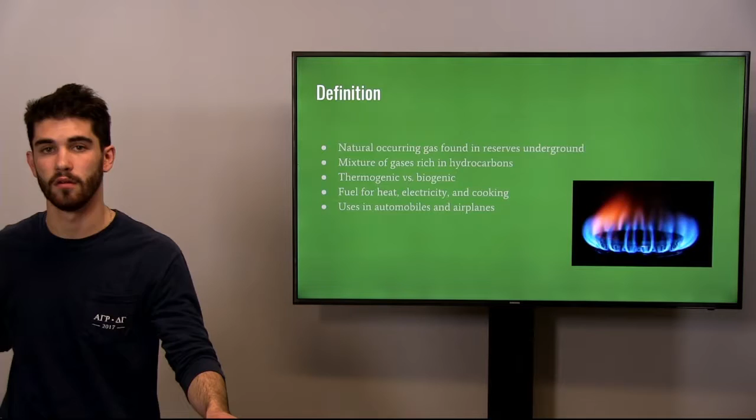Natural gas is used as an energy source for heat, electricity, and cooking. Along with these uses, natural gas can also be used as a fuel for both automobiles and aircraft. Liquefied natural gas is cryogenically stored for its usage. Condensation temperature ranges from about -120 degrees Celsius to -170 degrees Celsius, depending on the chemical composition of the gas. The advantage of LNG is its comparable density to both petrol and diesel fuels.

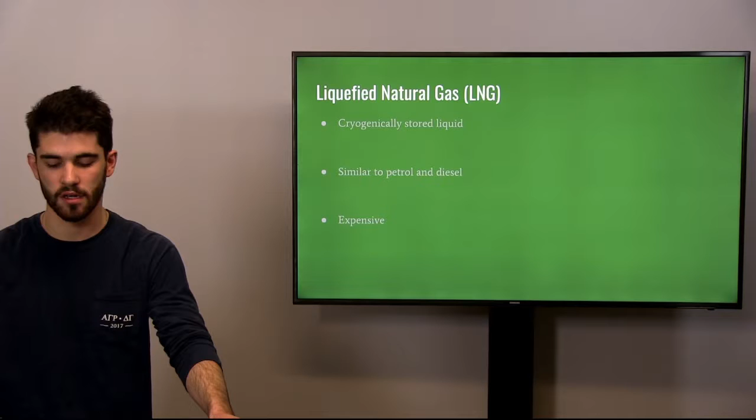It can reduce the need to refuel and extend driving range. However, the major disadvantage of LNG is the high cost of cryogenic storage and the upfront investments in both transportation facilities and dispensing stations. In countries like the US and Japan, this would be a viable option.

Natural gas is stored in high-pressure tanks within vehicles. The typical storage pressure ranges from about 20 to 25 megapascals. The combustion of CNG is a safer alternative to fuels like diesel, petrol, and liquid petroleum gas because of its fewer CO2 emissions. Another benefit of CNG is the fact that it's lighter than air and can dissipate quickly if leakage occurs. This would prevent explosions from occurring.

Liquid petroleum gas, also referred to as autogas, is another alternative to traditional fossil fuels. It is used as fuel for vehicles, heating, and cooking appliances. LPG replaces the chlorofluorocarbons involved with other fossil fuels in heating and cooking, and thus lowers CO2 emissions. While it still results in some air pollution, LPG, being a gas, does not result in ground or water pollution.

The main components of LPG are butane and propane, as well as butylene and propylene. It is a byproduct of natural gas processing and petroleum refining. Despite being a safer alternative to fossil fuels, LPG does not have the greatest engine performance. Another issue is that it is heavier than air and can lead to explosions if leakage occurs.

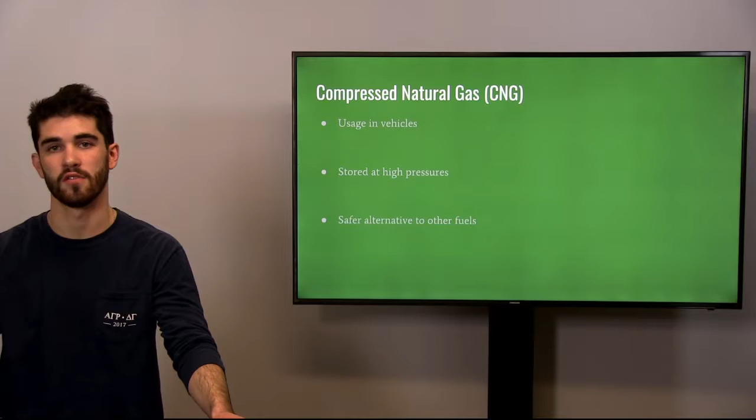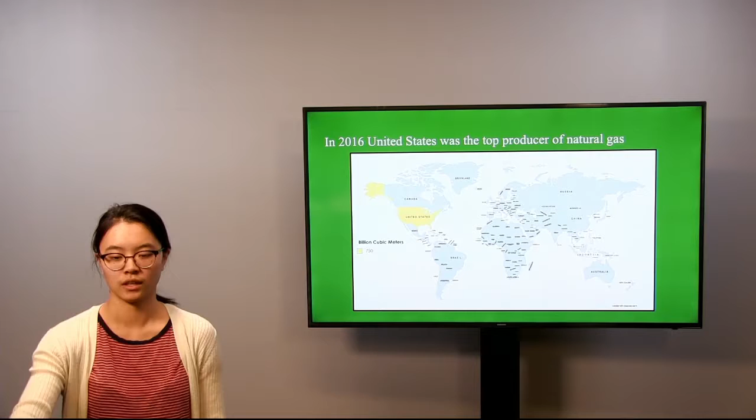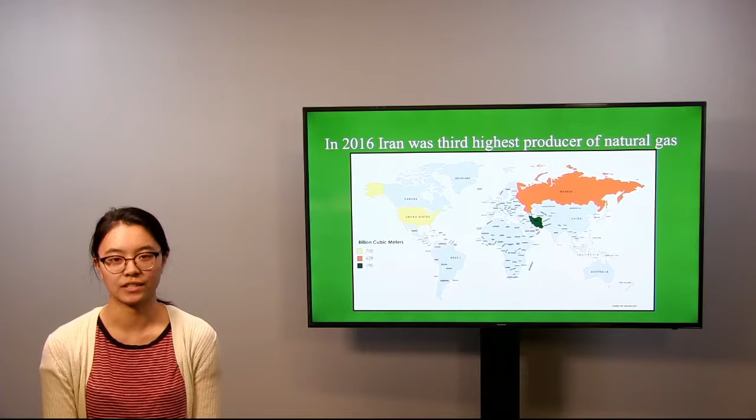So now we'll be talking about part 2, methods of extracting natural gas. But before we get into that, we will talk about the top producers of natural gas. In first place is the United States with 750 billion cubic meters. Second is Russia with 628 billion cubic meters. Iran was the third highest producer of natural gas with 190 billion cubic meters. And then fourth was Qatar with 167 billion cubic meters. And in 2016, the top consumers of natural gas were the United States, Russia, China, Iran, and Japan.

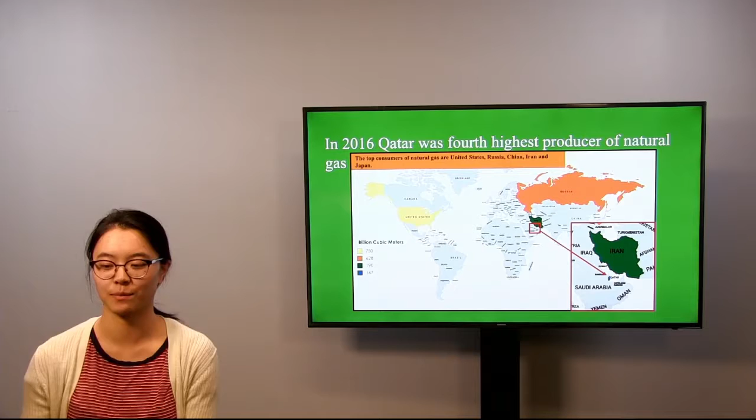Now we will talk about the extraction methods for conventional and unconventional gas. For conventional gas and unconventional gas, there are two different methods because conventional gas just uses the natural pressure and pumping methods, while unconventional gas is usually used for wells that are dried up.

So drilling is an extraction method for conventional natural gas. Step 1 would be to use a drill bit and pipe to create a vertical hole into the sandstone or the gas reservoir. Step 2 is to pump mud from the surface to the bottom and then to the surface for preparation. Step 3 is cement encases the casing, and within them is the drill pipe and drill bit. Then holes are drilled into the pipe for gas to flow in. And then step 5, the well is plugged and abandoned at the end of its lifetime, which is about 10 to 15 years.

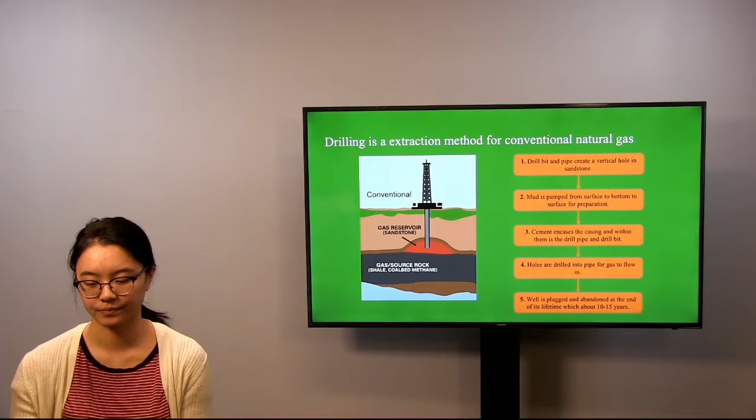So hydraulic fracking is used for unconventional natural gas. Step 1 is the well is drilled at least a mile before drilling horizontally into shale rock.

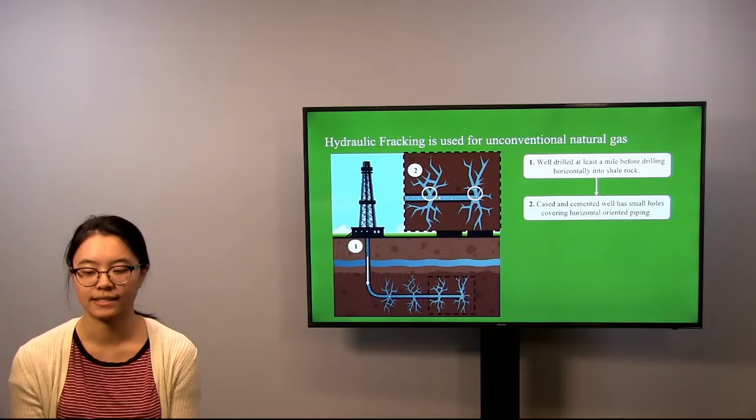Step 2 is it is cased and cemented. The well has small holes covering the horizontal piping to allow the gas to flow in later. Step 3 is a mix of 90% water, 9.5% sand, and 0.5% additives are pumped in at high pressure, and the sand is added because it helps keep the pathways open to allow the natural gas in.

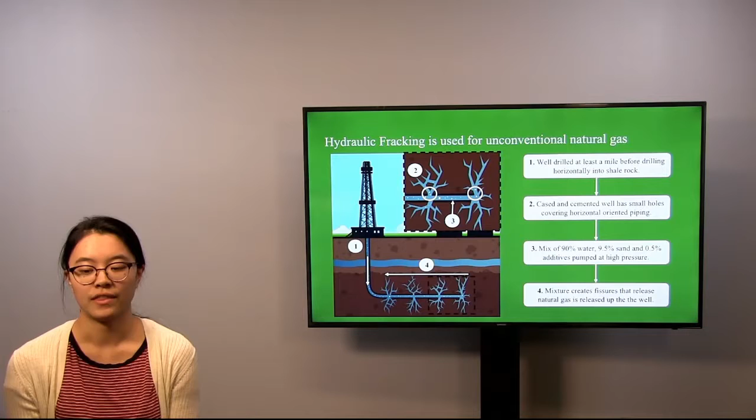Step 4 is the mixture that we just pumped in creates fissures that release natural gas into the well. And as of 2015, in the U.S., there are 21 states with active fracking sites, and there were 5 potential fracking sites.

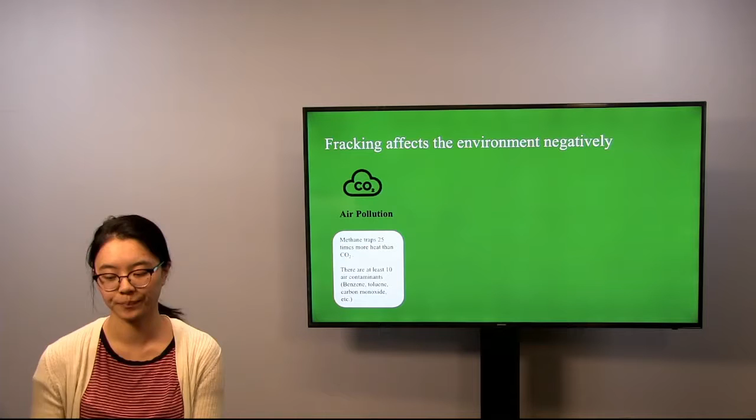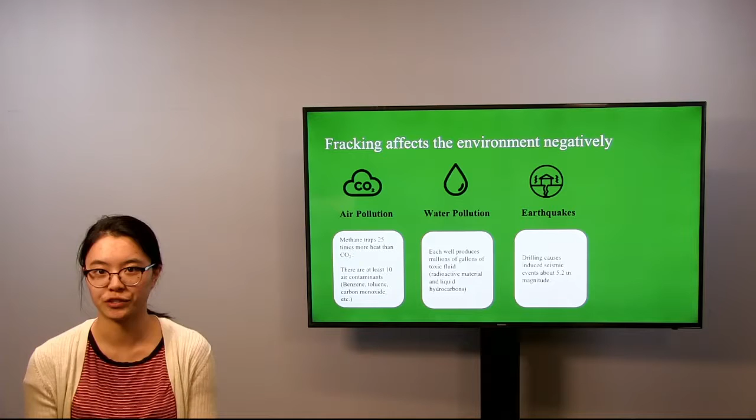For air pollution, methane traps 25 times more heat than carbon dioxide. There are at least 10 air contaminants: benzene, toluene, carbon monoxide, and more. It affects water pollution, so each well produces millions of gallons of toxic fluid, radioactive material, and liquid hydrocarbons. It also causes induced seismic events about 5.2 in magnitude. And it also causes soil contamination. There's a 5,100% increase in chemically tainted soil from drilling waste over the past decade.

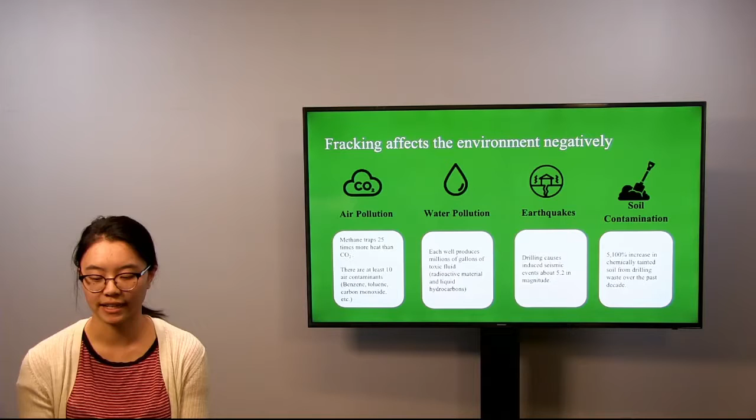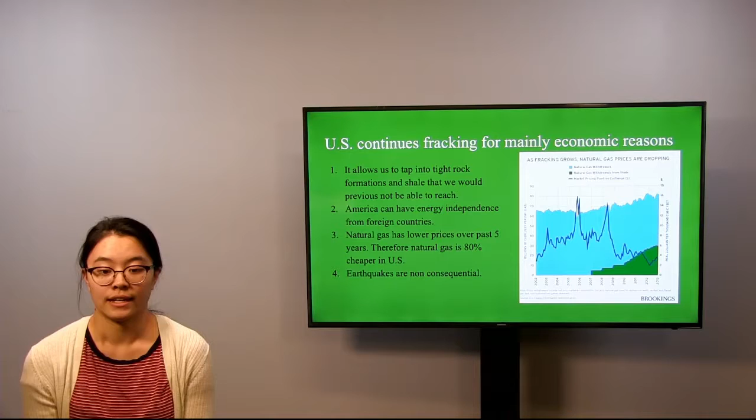And then to continue why the U.S. continues to frack: one, it allows us to tap into tight rock formations that we would not be able to reach with just normal drilling. Two, because America can have energy independence from foreign countries. And three, natural gas has lower prices over the past 5 years. Therefore, natural gas is 80% cheaper in the United States. Also, the earthquakes are not that big of a deal because they're only about 5.2 in magnitude.

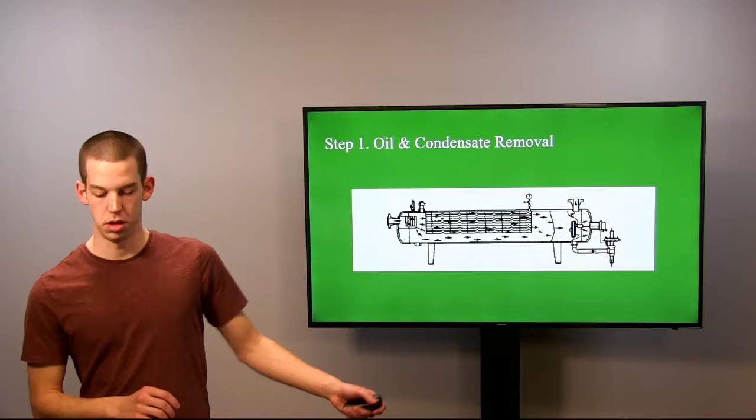I will be talking about the refinery and the liquefaction of natural gas. So, in step 1, we have a conventional separator here. This takes in raw natural gas right next to the oil well, and it converts it to liquids and gases. It separates everything out. That happens with the force of gravity, so it enters here on the right, and then it goes to the left and separates. So step 2, we need to remove the water. Step 1 did remove a good portion of the water, but now we need to completely eliminate the water.

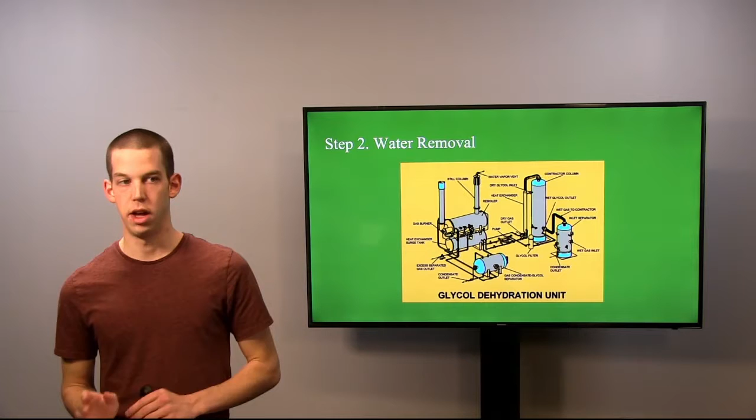This can be done by 2 methods, which I'll be talking about, but one of the most common methods is called glycol dehydration. Natural gas is pumped into a bin that has a glycol solution in it, and the water molecules bond to the glycol, and it sinks to the bottom of the tub, and then that gets reused for later usage. The glycol and the water can be separated by heating up the mixture between 212 degrees and 400 degrees Fahrenheit.

Another common process is called solid desiccant dehydration. It's very similar to glycol dehydration, except you use solids instead of solutions. The natural gas is dropped from the top of a large absorption tower, and it's filled with many different arrays and beds that have solid desiccants that bond to the water, and as the natural gas falls, the water is removed from the gas.

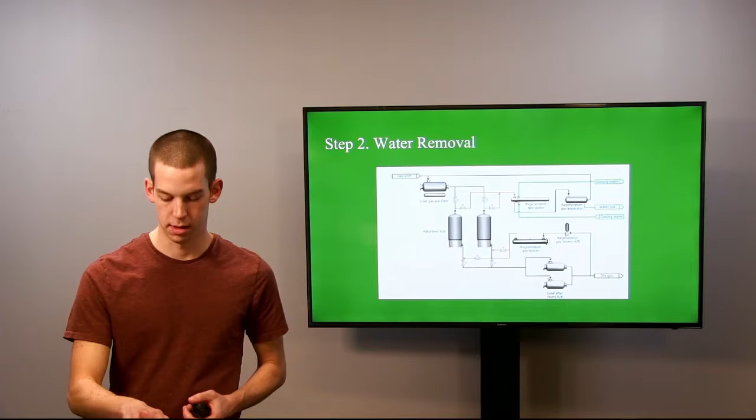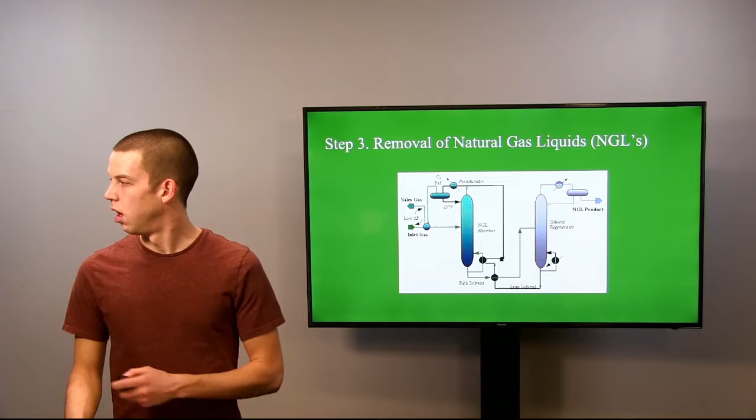In step 3, I will be talking about the removal of NGLs. Once our water is completely removed, the NGLs need to be separated from the natural gas, and the NGLs then need to be broken down. One method is the absorption method. This method is very similar to glycol dehydration, where it uses a solution that absorbs the NGLs, but this is not very efficient. The most efficient process that we have so far is called the cryogenic expansion process, where the feed of natural gas is chilled down to -100 degrees Fahrenheit, and all the hydrocarbons condense while the natural gas remains pure.

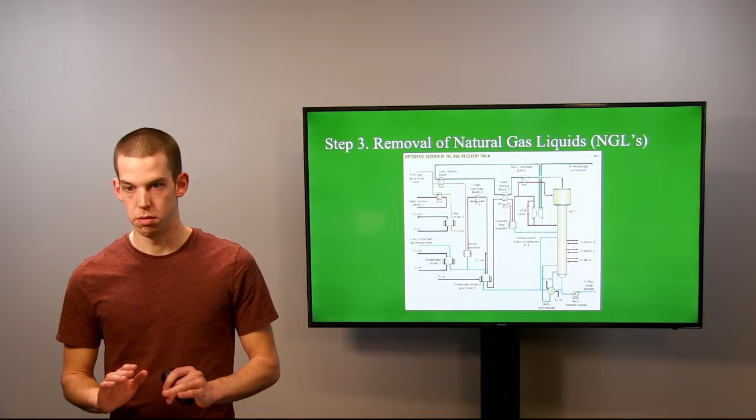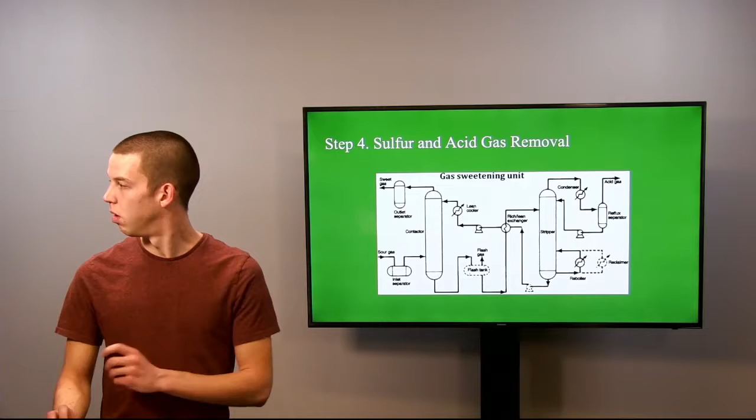Step 4, we need to remove the sulfur and acid gas from the natural gas stream. One of the most common processes is called gas sweetening. This is where a solution similar to glycol dehydration is attached to the H2S molecules within the stream. The solution that is combined is monoethanolamine and diethanolamine, MEA and DEA for short. Another process that can be used is called solid desiccant, or Claus process. This uses thermal processes and catalytic processes to remove the sulfur and the acid gas.

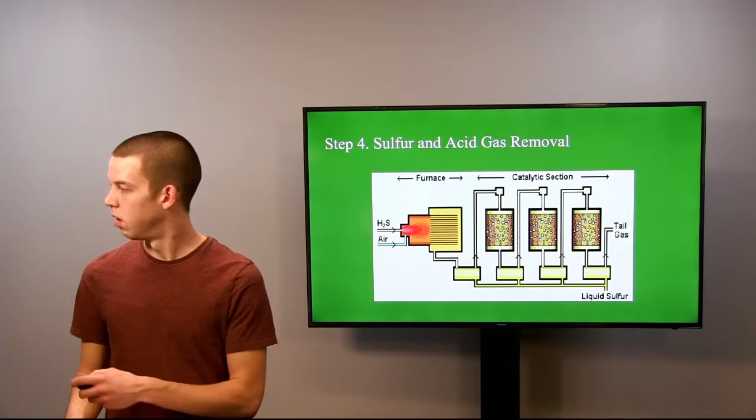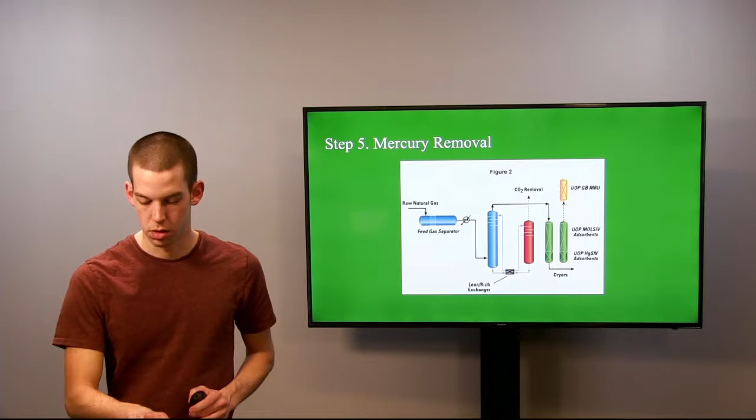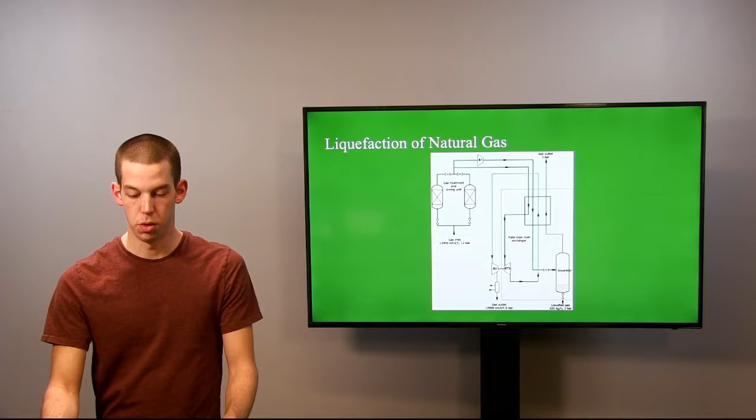So then for the liquefaction of natural gas, it's not very easy to transport a gas. So what we do is we condense it down to a liquid for easier transportation. This is done by cooling the natural gas down to -260 degrees Fahrenheit, and it makes for a lot easier transportation. As we say, the United States produces a large amount of natural gas itself, and the United States exports and imports a significant amount of natural gas from other countries as well.

But as we learned in the class, many of the natural gas companies burnt their natural gas rather than sell it to the market, because constructing a natural gas pipeline needs a considerable budget. To construct a natural gas pipeline, we need to install a valve every 5 to 20 miles, and a compressor station every 20 to 100 miles. It is quite expensive to install, but it also has an economic benefit over using a truck.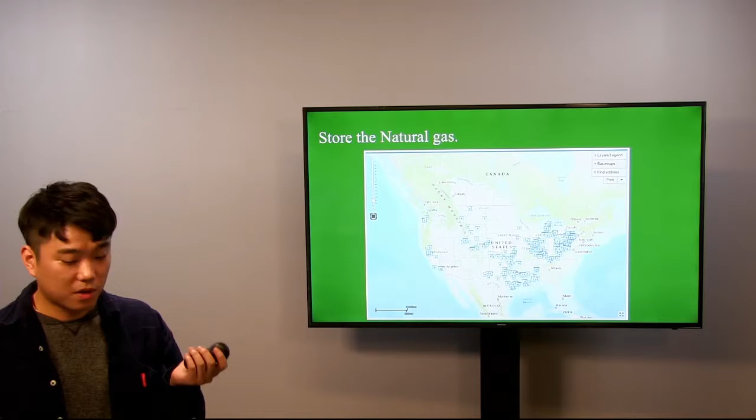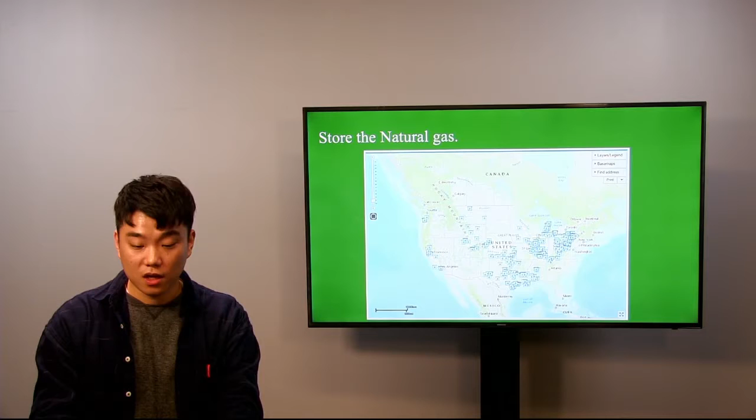So next, I'm going to talk about the 2 different methods to store natural gas: first, underground, with 3 types, and second, above the ground. This map shows the underground natural gas storage in the U.S., and the U.S. can store 1,530 billion cubic feet of natural gas in storage, including underground and above the ground. Underground storage is the most common form, and the reason we use this method is that underground has a stable temperature, which means the temperature change is not that big, and it has a higher pressure, which means natural gas supply is more controllable.

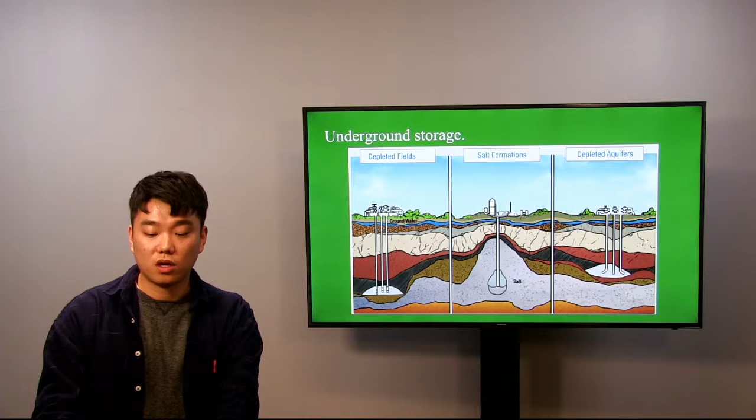The difference between these 3 types is what kind of formation they use and how deep it is. So the first type is the depleted field, and 79% of U.S. underground storage is this form, and the second one is salt. This one takes 11% of the U.S., and less for number 3. It costs more than above-ground storage, but it is safer and more controllable. And this form is the most suitable form to store natural gas for a long period.

So next is the above-ground storage. It is not the best option, but it is applicable to places not suitable for installing underground storage. This storage needs a compressor and cooler, which the underground storage doesn't need. This storage is usually used for short-period storage.

So next, I will introduce new technology that can skip some steps to make natural gas usable to us. So first is FLNG, floating liquefied natural gas. This technology and ship can skip the liquefying process on the ground, because this ship already has the special equipment to condense and cool the natural gas to LNG. So the company can save the money of installing a pipe from the ocean to the ground and a liquefaction facility. This ship has an economic benefit, but the price of the ship is very expensive.

So the next technology is the exact reverse process of the FLNG technology. We call it FSRU, floating storage regasification unit. This ship can convert LNG to natural gas consumable by us. It already has a regasification unit, so it can bring energy from another country or take LNG from another tanker in the harbor, then regasify the LNG, and then send the natural gas directly to the pipeline installed in the harbor.

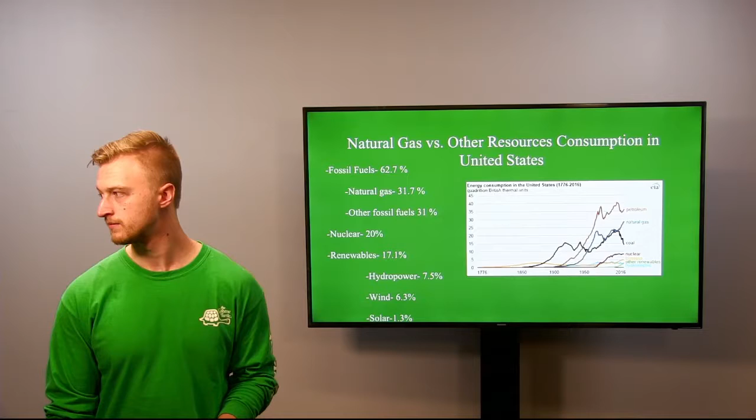And here's a breakdown of natural gas and the sectors that it is broken down into in the United States. So for the first one, we have electric power, which is just generating electricity through natural gas, which takes up, I shouldn't say majority, but a large portion at 36%. The next highest we have industrial at 34%. And this is natural gas as a fuel for process heating and for combined heat and power systems, and as a raw material to produce chemicals, fertilizer, and hydrogen.

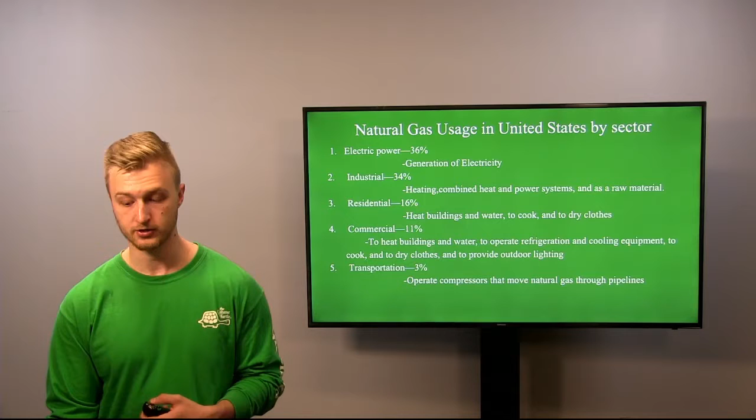Number 3 usage is residential, which is used to heat buildings, to cook, and also to dry clothing. Number 4 is commercial at 11%. Again, used to heat buildings and water, to operate refrigeration and cooling equipment, also to cook, dry clothes, and to provide outdoor lighting. And the last one, a very small percent, 3%, is transportation, which is to operate compressors that basically just move the natural gas through the pipelines.

And now the advantages of natural gas. The first one being price. Compared to conventional fossil fuels, natural gas is a cheaper option. Second thing is environmental, which can be a pro and a con. As a pro, it does emit less fumes and less emissions than conventional fossil fuels, but it still does lead to emissions when there are renewable resources that obviously don't lead to emissions. I'll touch on this later. Next one is transportation.

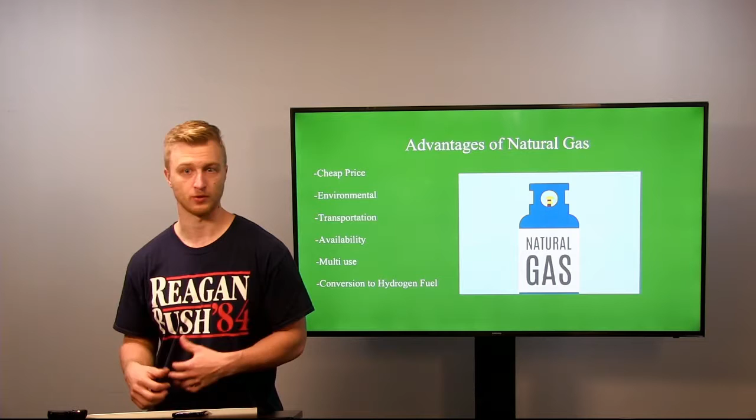So natural gas is much easier to transport between lines and pipelines. The availability of natural gas: there's a lot of natural gas available throughout the world, not only the Middle East, but in America and basically all around the world. Fifth one is multi-use. So basically you can do a lot of different power generation with natural gas, from heating homes to industrial. And then the last one is conversion to hydrogen fuel. Right now it is currently the cheapest option to convert to hydrogen fuel.

The disadvantages of natural gas. The first one being flammability. Gas leaks can be very dangerous with natural gas, since it is a highly flammable and highly toxic gas. Number 2 is environmental, which I'll touch upon later. It emits less fumes than your conventional fossil fuels. However, natural gas still does emit some fumes compared to renewable resources such as wind or solar that don't emit fumes. And that leads me into my next one, which is non-renewable.

Even though over time there will be more natural gas that is created underneath the surface, for right now, once we use it, it's done. In our lifetime, it's not going to be regenerated. The last one is installation. It is very pricey to install the rigs and the transportation of natural gas. The initial startup can be a little bit expensive.

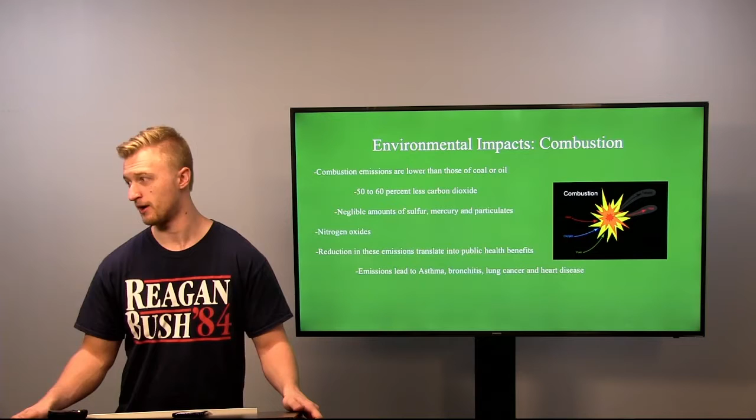As I mentioned before, as a pro and a con, is the combustion of natural gas. Natural gas emits less fumes than coal and oil, about 50 to 60% less carbon dioxide, and also small amounts of sulfur, mercury, and particulates. However, natural gas does release some nitrogen oxides, and the reduction in these emissions that natural gas does have is good for public health, because these emissions could lead to asthma, bronchitis, lung cancer, and even heart disease.

Another environmental impact of natural gas is fracking. So the problems of fracking break down to 3 categories. The first one is the fracturing of wells requires large amounts of water. This has been a topic of debate because it could be seen that the water used for fracking could be used for other sources, and that this could be a waste of water and there's better ways to use it.

The second one is large amounts of wastewater at the surface. So when fracking occurs, the water is also pumped with chemicals, and this excess water, after it gets pushed through the ground, ends up pushing its way up to the top, and then you have a lot of excess water with chemicals in it sitting at the top. This could be dangerous to kids, to wildlife, to plants. This is a big topic right now in fracking.

And then the last one is the contamination of drinking water. So there's been reports that drinking water can be contaminated by this fracking water, though no actual documented cases have been proven, and this myth seems to be debunked.

In conclusion, natural gas is a safer alternative for the environment than traditional fossil fuels like coal and oil. Although it still results in some CO2 emissions, and the fracking of natural gas can contaminate drinking water, the benefits far outweigh the negatives. It is cheap and easily transportable, and we have abundant access to it. It is still environmentally cleaner than the other fossil fuels, and it is a reliable fuel source.